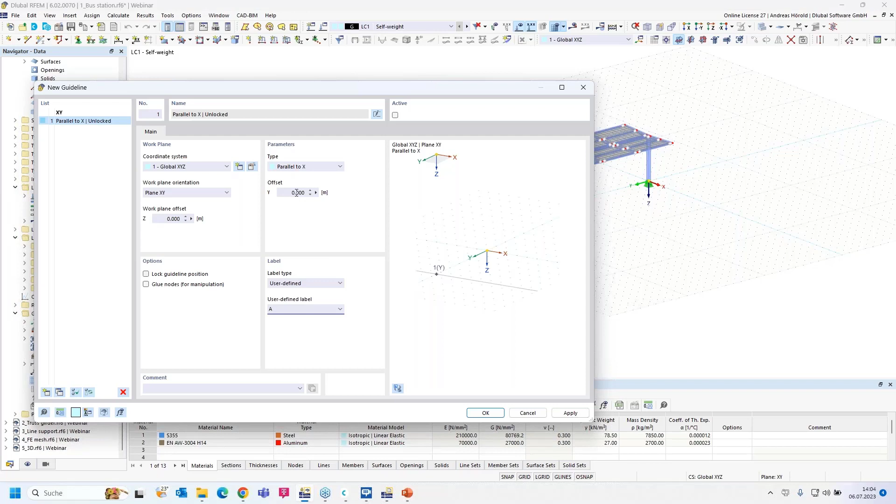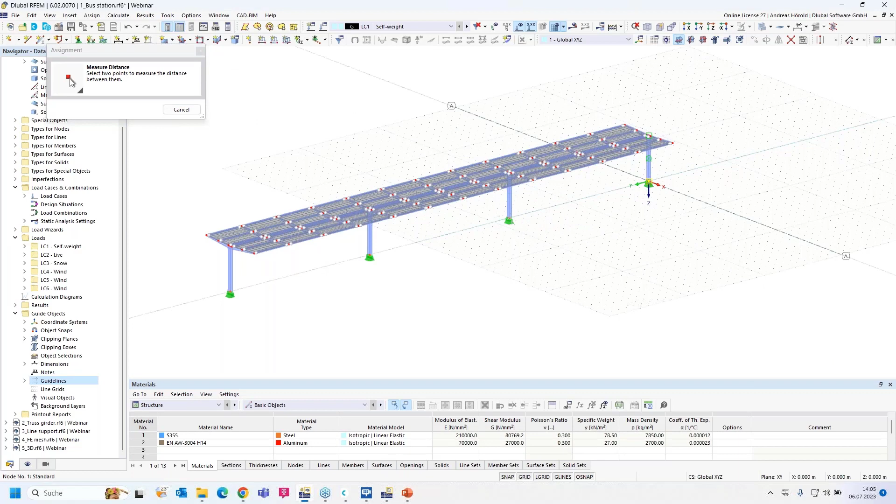So, we start with the first guideline. We call it A, parallel to X, and start with an offset of 0. Apply - and you can see in the RFEM window that the first guideline has been created. We activate it, then copy the guideline and change the offset. Let's measure the distance between the two columns here - okay, 18 meters - and we rename the guideline.

Apply. Then we create the other guidelines with the same workflow - 36 meters - and rename the guideline. Apply. Then the last guideline: I only change the offset and the name.

So all the guidelines in the X direction are created. Now you can see the distance between the guideline's name and the node is very far. You can change that - for example, by right-clicking and pressing edit. Or I'll leave the dialog and show where else you can find it, under Tools at the top: Tools, Work Plane, Grid, Snap, and so on.

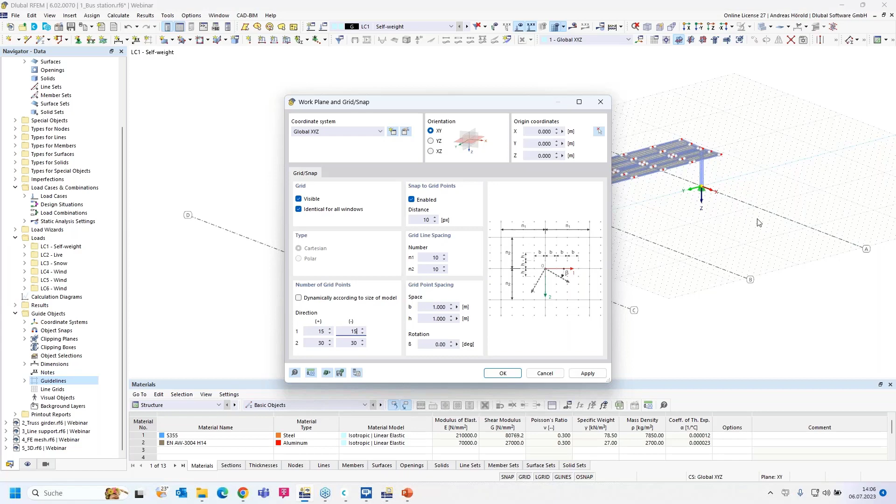Okay, then you can enter distances here: 15 plus and 15 minus in the X direction, and for example 70 and 10 in the Y direction. I apply, and you can see the name has moved near the node.

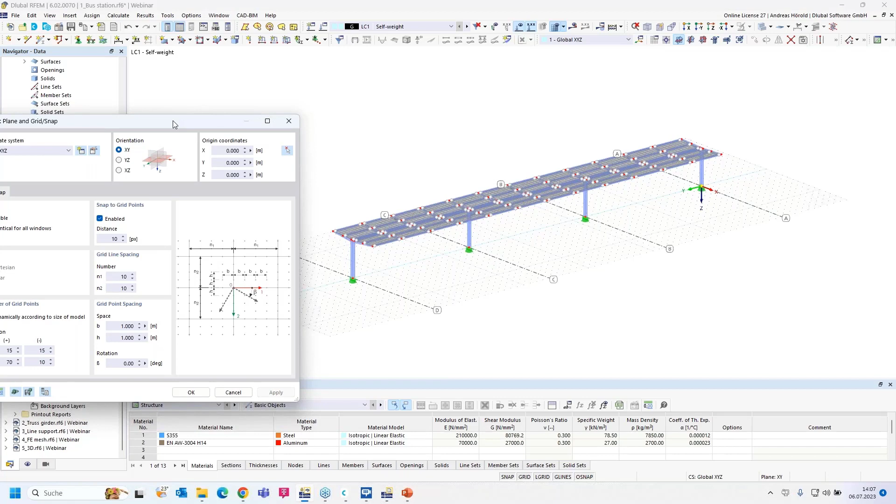You can also check dynamically according to the size of the model. Let's do that - and you can see that the number of grid points are created automatically.

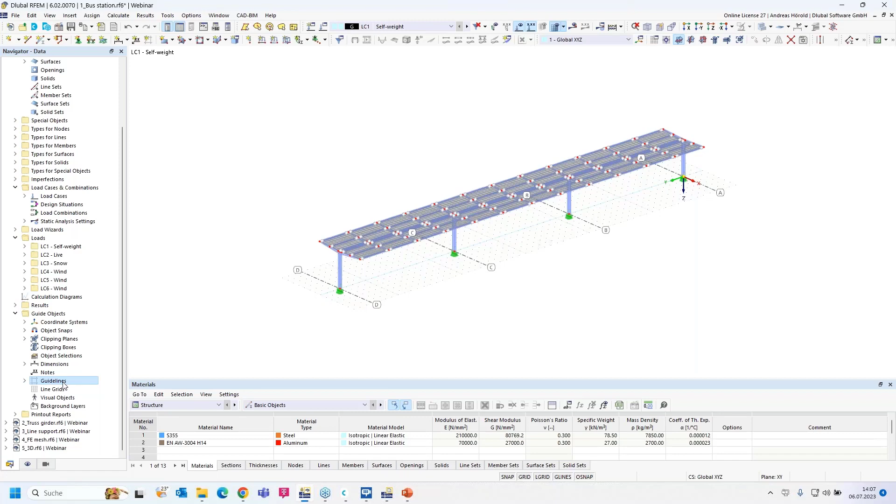Now let's create the last guideline in the Y direction. I create a new guideline, parallel to Y, offset 0, and a user-defined name - I name it 1. Apply that. Now everything is okay.

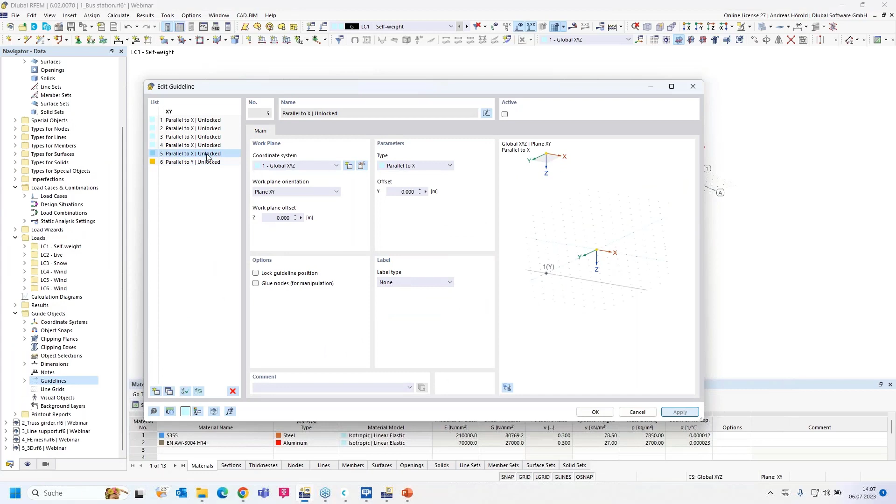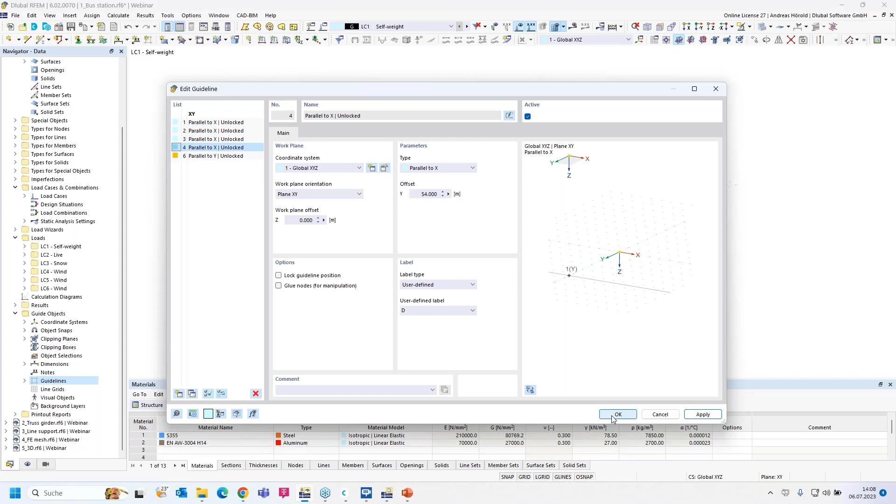No, this one is not correct. Now you can move, copy, or delete all the lines here, or certain lines. Okay, now our guidelines are created.

Just an example. So then we turn to the next model and the next question. Next question is: I came across the area of load application setting in the load wizard. How does this setting affect the magnitude of the load in my model?

So this is a load that has been created with the load wizard. I double click on it, and you can see that dialog. And how you can create such a load, I will show that.

First, you have to select in the base data, here left at the top, under add-ons the load wizard that must be activated, but this is a default setting. The combination wizard and the load wizard are selected by default.

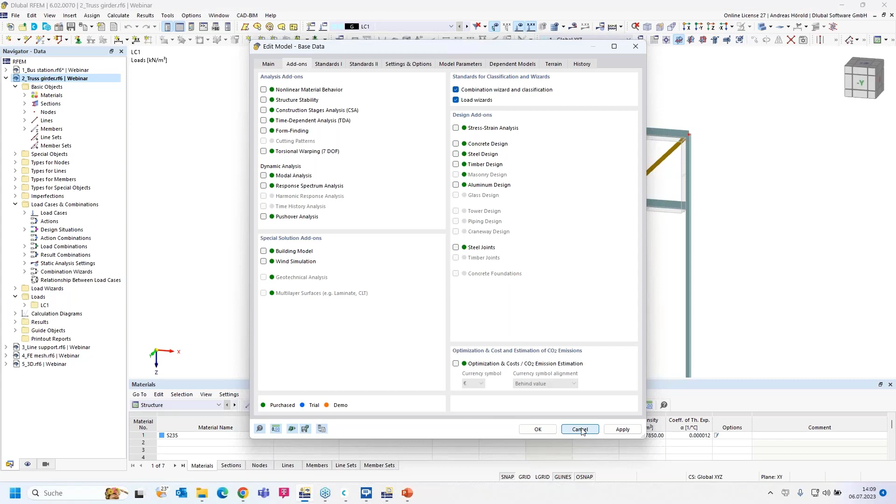And then here on the left side at the top, insert, there are the load wizards. There are different load wizards: member load from area load wizard, for example. This is the load that I created before, what you can see in the model. There are also the snow load wizard and the wind load wizard, for example, and our two wizards.

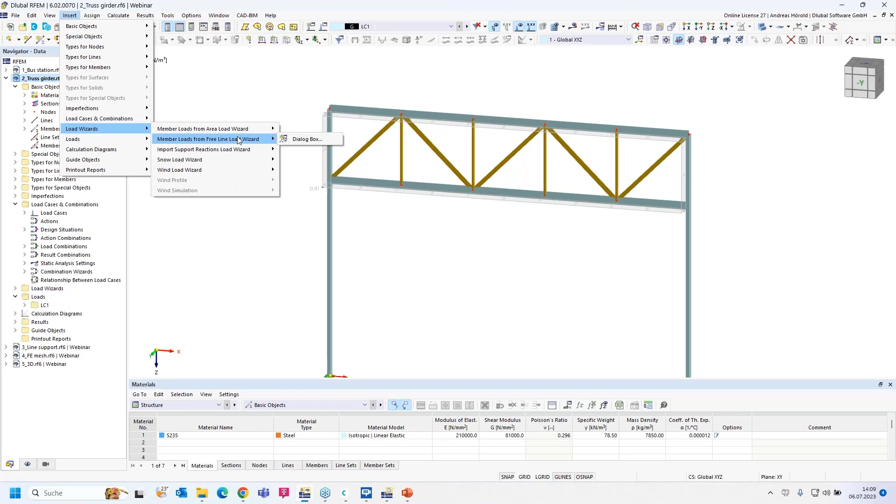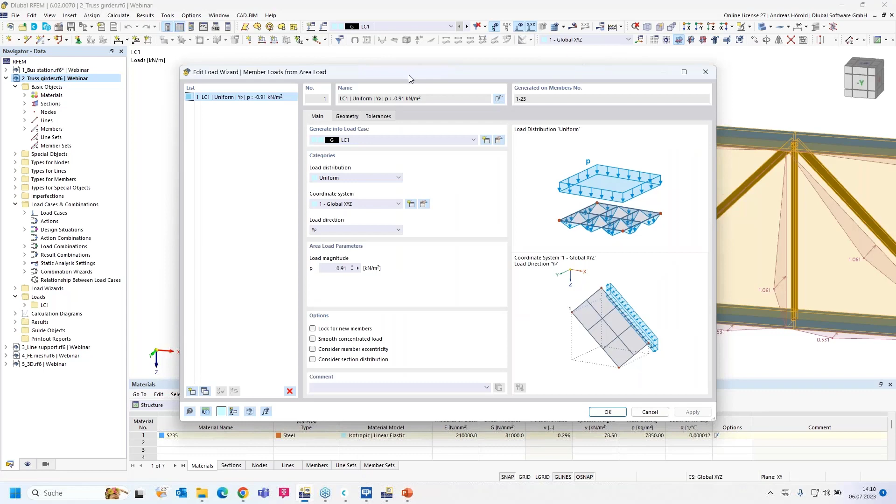Okay, let's display it separately. Now with a right click, I can display the loads separately. So now I double click on the load and open the dialog. Under geometry, you can see this setting: fully closed plane.

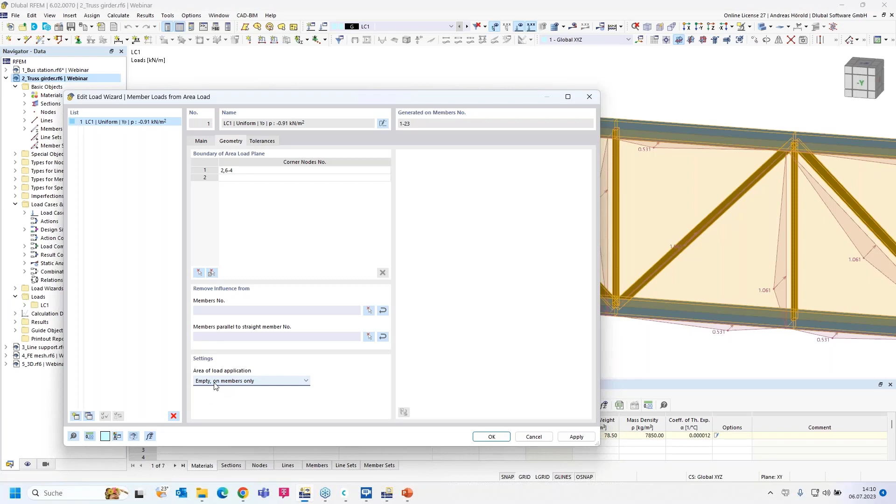The complete, where there's, for example, a plate or the trapezoidal sheet over the members, and all members get a load, and the wind can affect the full area here. So if you want only the members to get a load, only this small area, then you have to select empty on members only.

We can see that at the moment the vertical and the diagonals get a load of about 1 kilonewton per meter, and if I apply that, you can see that the load has decreased. Only the members are affected by a wind load.

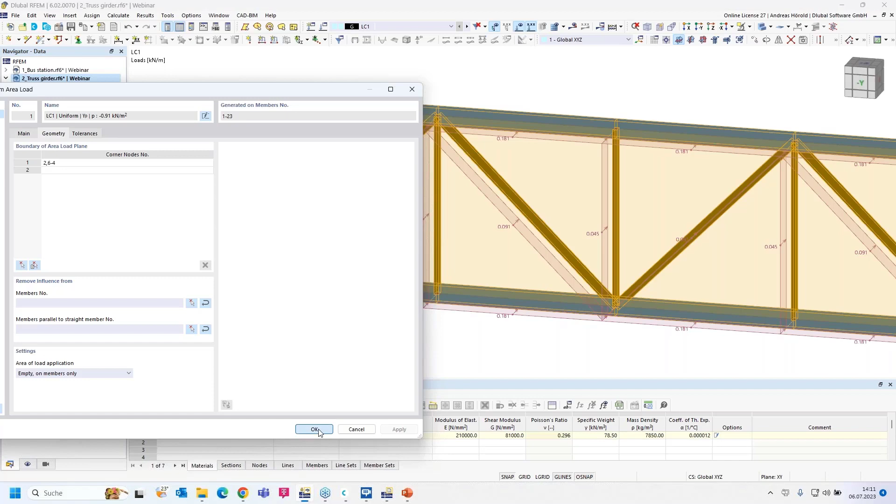So if you, for example, change that member - at the moment the width is 10 centimeters or 100 millimeters - and if I rotate the section, for example 90 degrees, you can see the load has decreased from 0.1 for this diagonal, and now it's only half of this value.

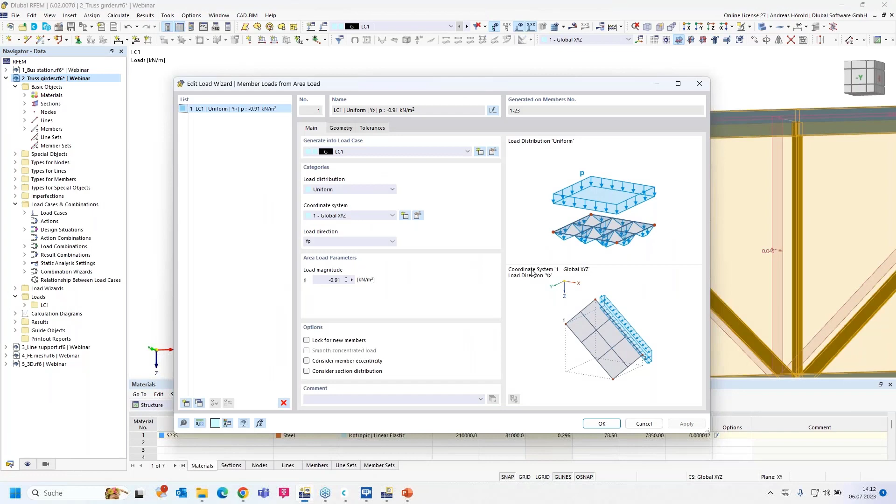Okay, that's the setting. I changed that back, or I press undo, and you can see now the load is 0.1, or about 0.1. And I do another change.

Imagine that, for example, a trapezoidal sheet spans from the lower beam to the upper beam, and only these beams are affected by the load or support the trapezoidal sheet. Then you can remove the influence from members parallel to straight members. I select all 3 members, and all members that are parallel to these 3 members don't get a load. Let's try that.

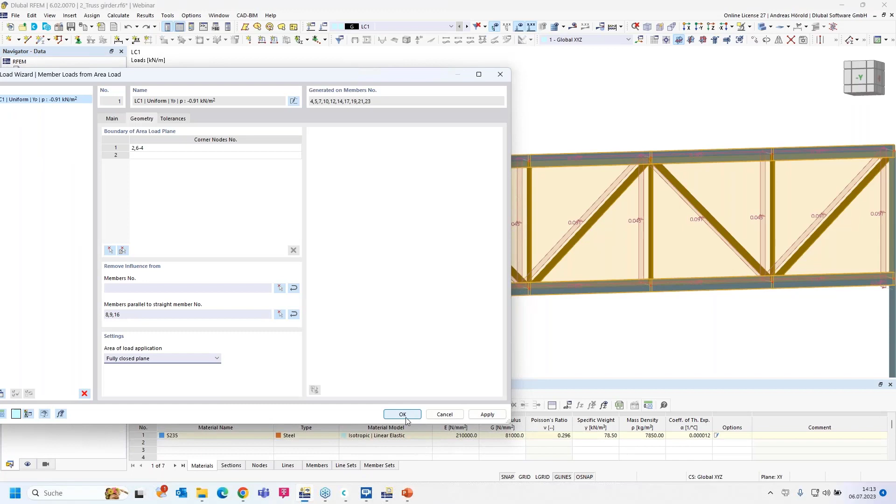Fully closed plane. Okay, so now that's the effect when a trapezoidal sheet spans from the lower to the upper horizontal beam.

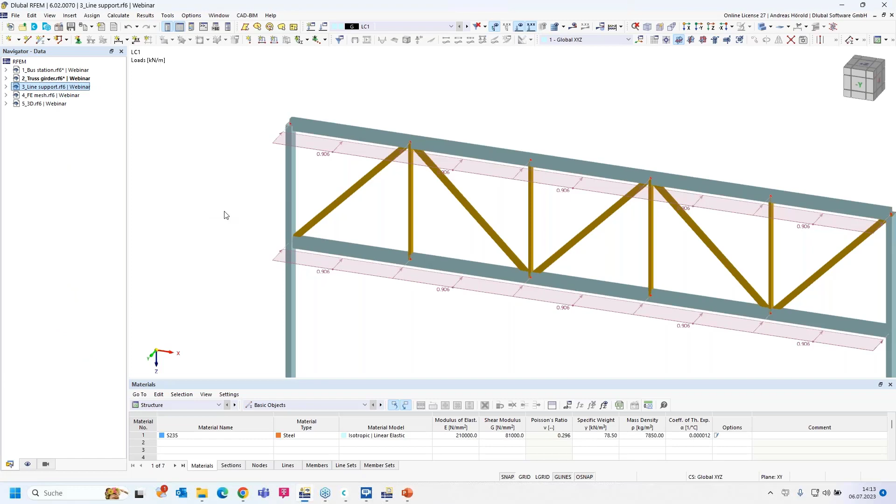Okay, let's turn to the next model and the next question. A surface model, a concrete slab from a building, for example. And the question is: can I get the program to calculate the spring of a wall for line support while modeling the wall at the same time?

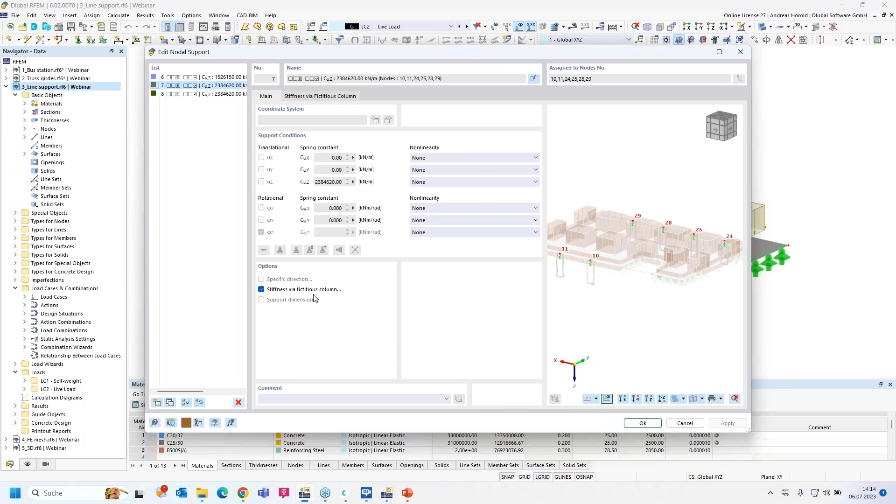In an earlier webinar, we showed a similar function or feature for the nodal supports. Let's double click on this nodal support, and when I press the edit button, you can see where 'stiffness via fictitious column' is selected. And when I turn to this dialog...

I can model the support by elastic surface foundation, elastic nodal support, and so on. You can enter dimensions, the height, and so on. Then if the column head is hinged or semi-rigid, and when you change that, the values for the springs are changing.

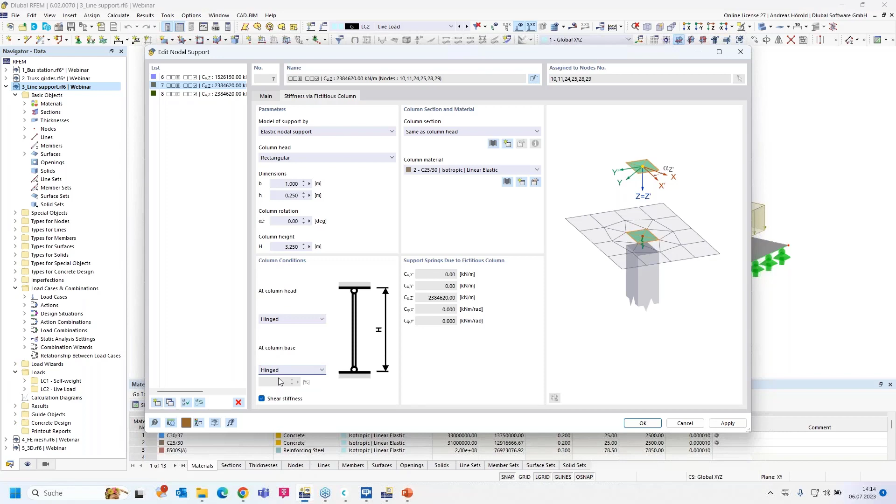Okay, so I leave the dialog, and we have got a similar function for the line supports. I double click on the line support and edit all the used line supports.

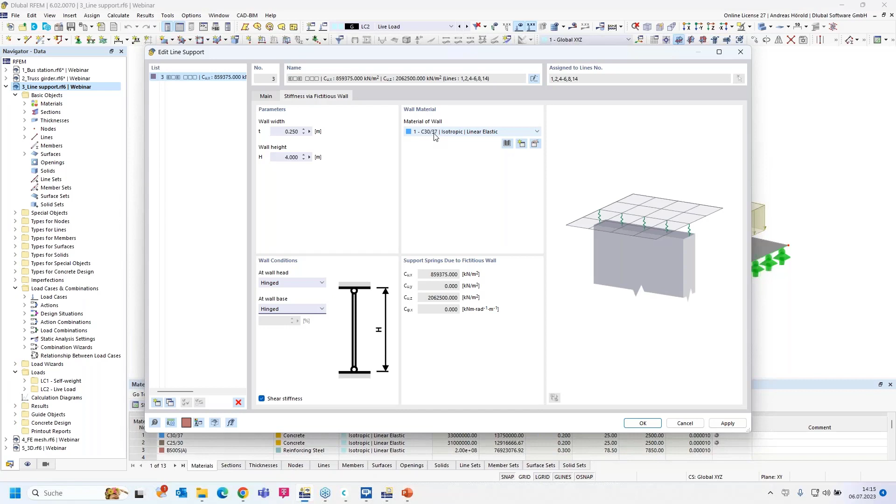Now you have to check the stiffness via fictitious wall. In the preview, you can see the walls already. You can enter a thickness of the wall, a wall height, and whether the wall head is hinged or rigid. Also for the wall base, you can enter a material. I'll leave the concrete material as it is, and you can see the considered wall in the preview.

Okay, and now you can see also springs for the line supports here, and this can avoid or smooth singularities in the FE calculation.

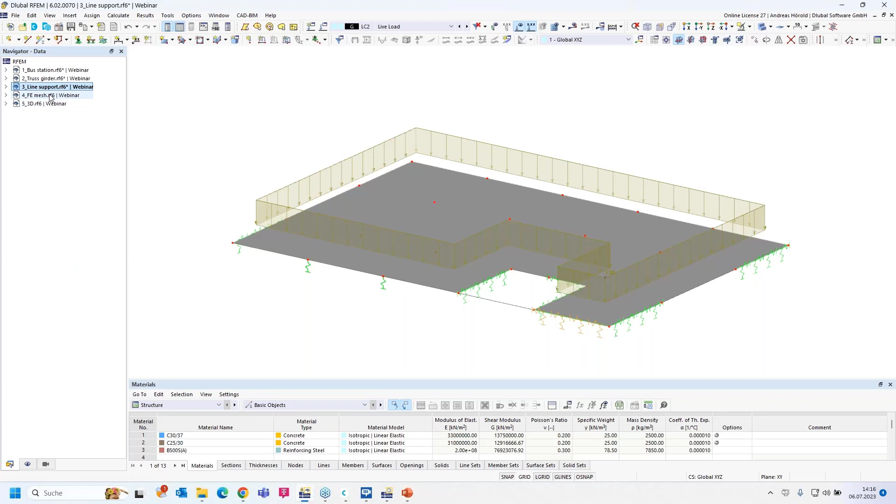Okay, that should be all to this question and this model. We turn to the next model and the next question: how can I create multiple FE elements across the thickness of elongated thin solids without having to create an extremely fine FE mesh? At the moment, you can see a steel plate here with a thickness of 20 millimeters.

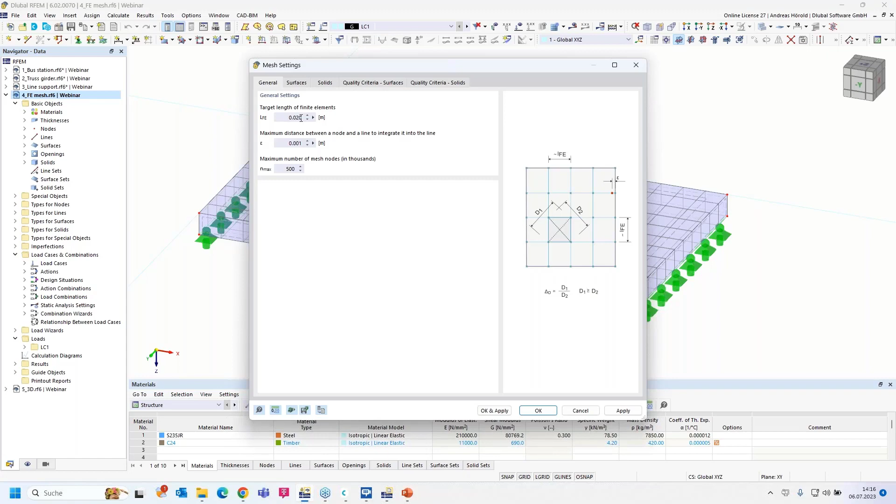I can go to the FE mesh settings. The FE mesh size is 2 centimeters, 20 millimeters, that's the thickness of the steel plate. For the width and length, the size of the FE mesh is quite okay, but not for the height. There's only one FE mesh.

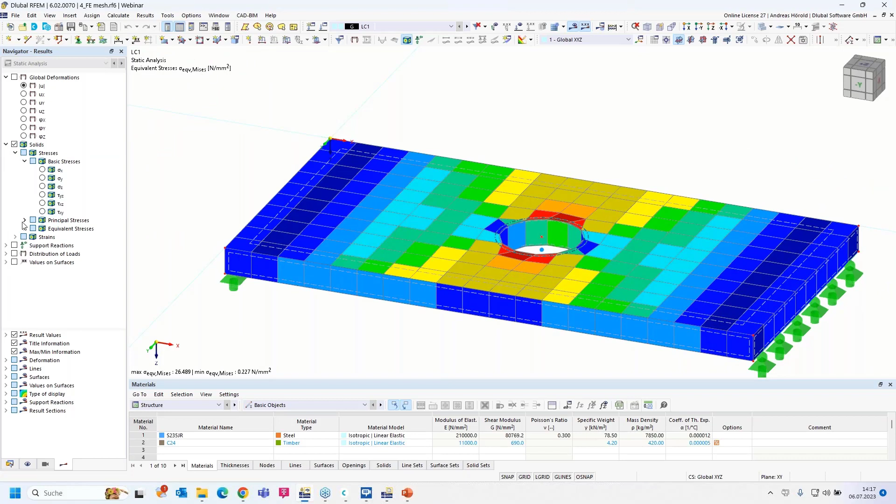You can see that in the results. There is only one FE element, and in that case the results for what is selected, the equivalent stresses, sigma V mises, are not okay.

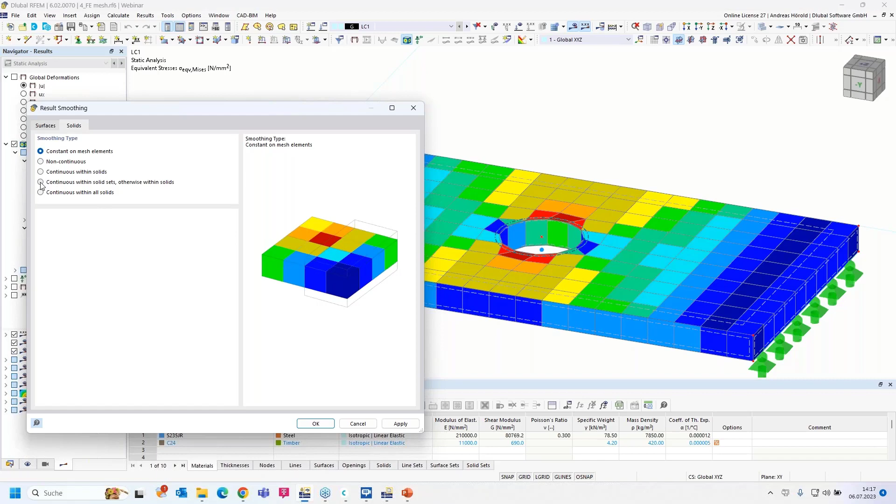So I double click on that point here to get into the dialog from the solid. Another possibility would be to go on the left side to the navigator data at the bottom, then open the solids - there's only one solid. You can double click on it or right click and edit, and the same dialog opens.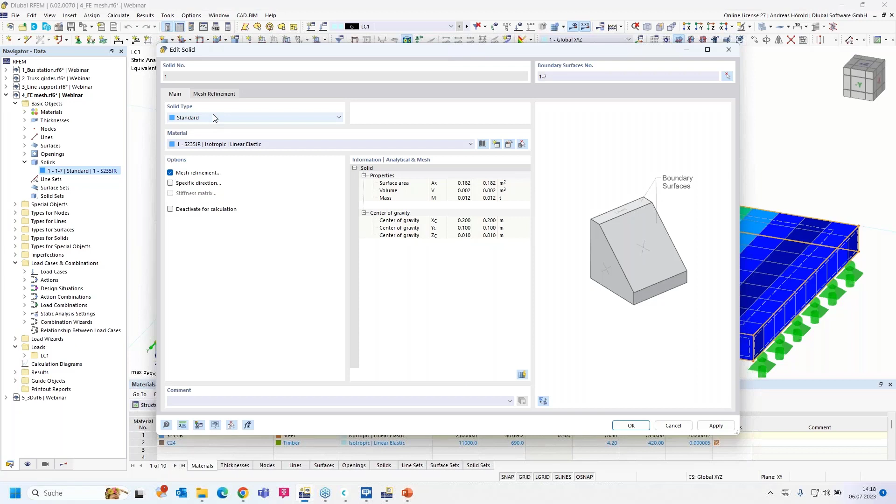So then mesh refinement I selected, and there is a quite new feature, the layered mesh. If you activate it and select one area or one surface, then the opposite surface is selected automatically by the program, and you can see in the graphic you can define a number of finite element layers.

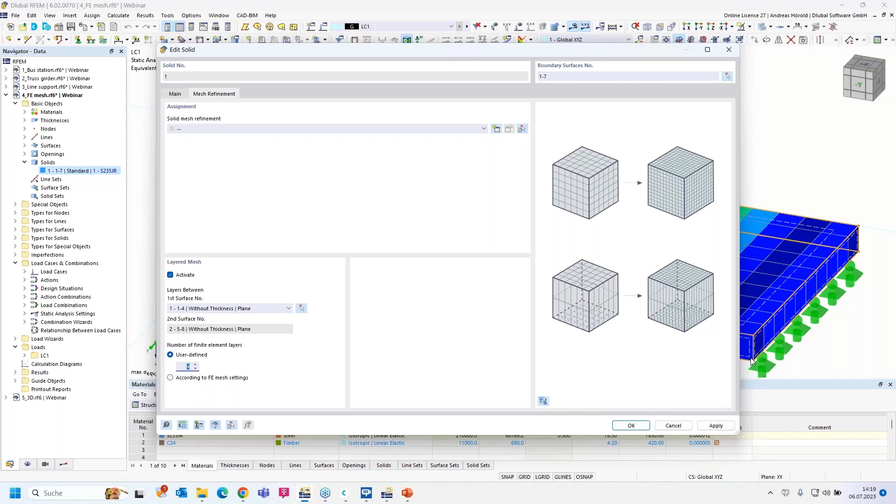So I increased it to 4 - at least 4 or 5 mesh or FE elements should be used for one distance here, in that case for the height or for the thickness. Okay, I applied it. Let's create here at the top.

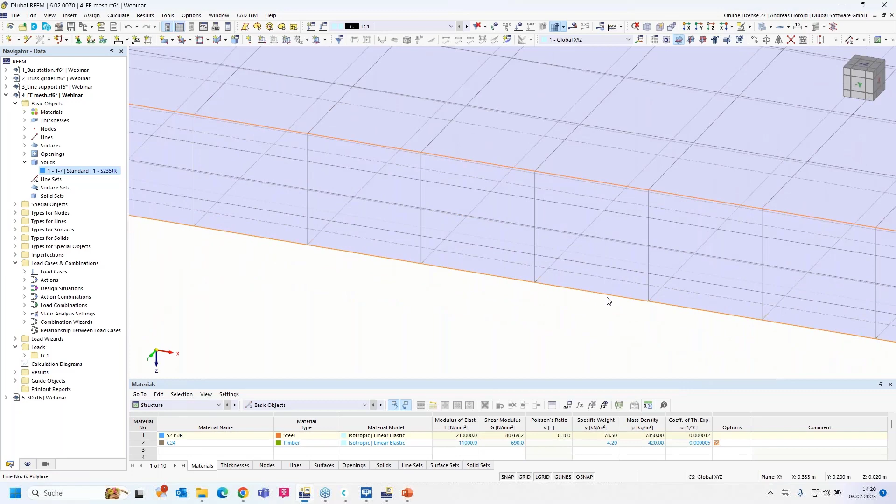We'll generate the mesh. Okay, and now you can see there are 4 elements or 4 layers for the thickness. Let's calculate all again. Okay, that looks quite good - there are 4 elements in the height, and the results are better than before.

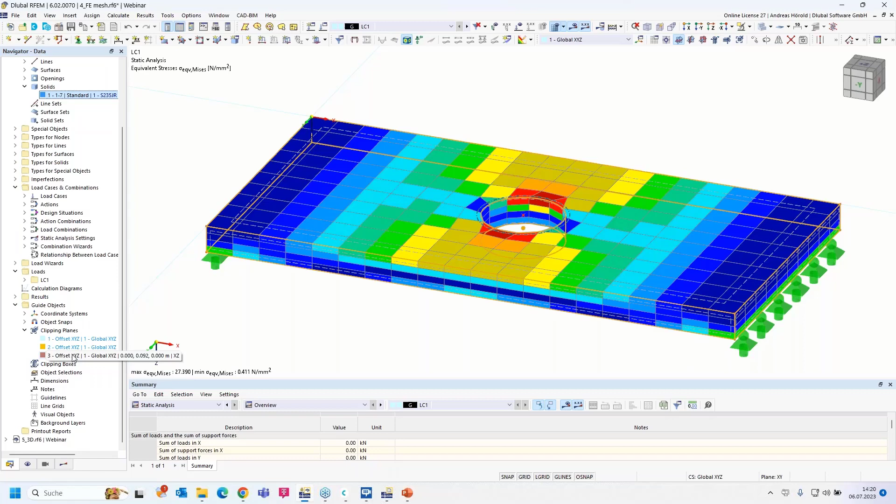Let's go through the solid here with the guide objects with a clipping plane. I activate any plane here, and now you can go through the solid and you can see the results are quite good, or good to evaluate.

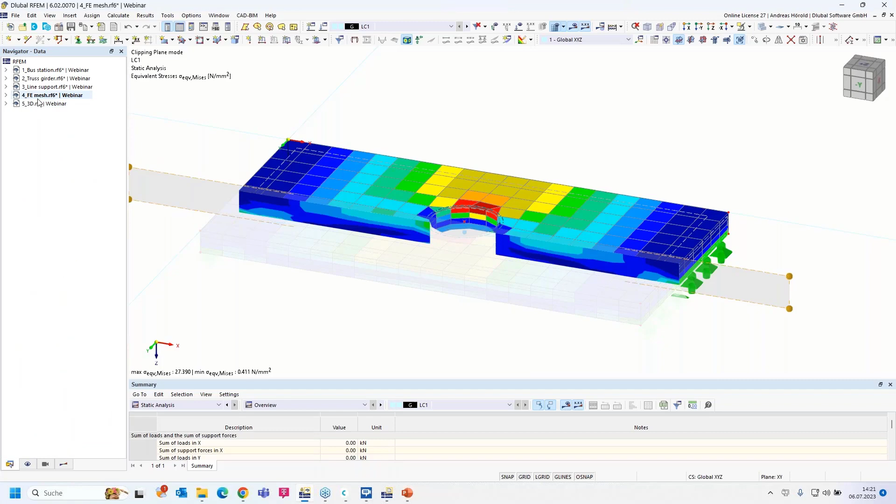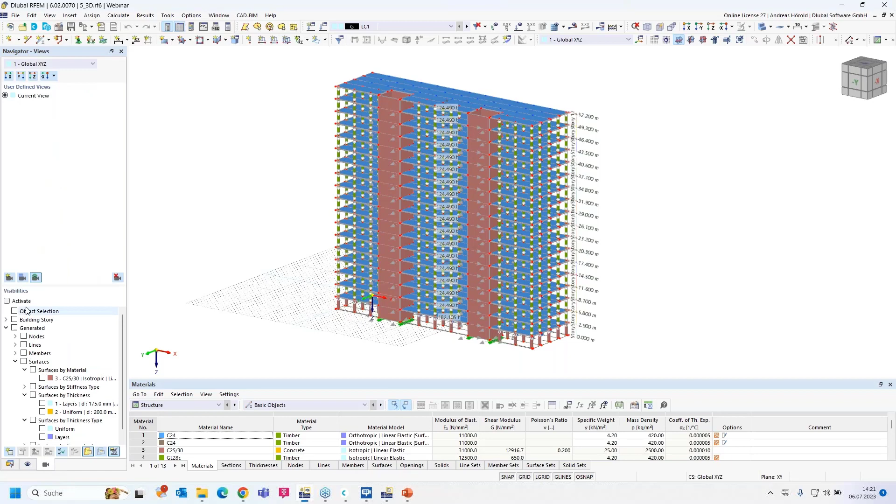Okay, that's all for this model and this question. The next question is, how do I customize the appearance of objects in the background? So you can, for example, select only the concrete cores. At the bottom left, you can go to the views and then activate the visibilities and the concrete surfaces.

And you can see the hidden objects are quite good to see, but a lot of users ask, how can I modify the transparency? So how do you do that?

Yeah, you can, of course, completely make that invisible with this function here, show hidden objects in background. You can deselect that and you can see the deselected objects.

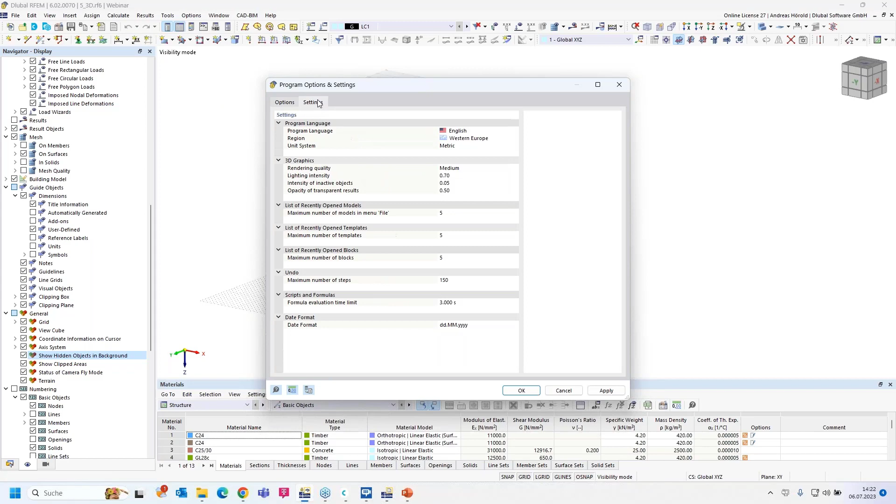So let's change or modify the transparency under options at the top. You can go to the program options, and under settings you can find this setting here, intensity of inactive objects.

Now you can increase the number here, apply, and you can see the changes.

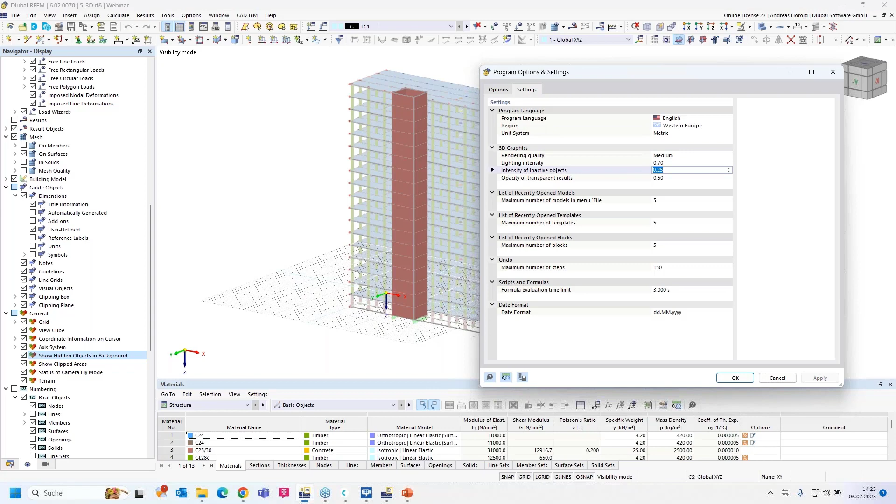Okay, quite an important feature, I think, because sometimes it's annoying when you see all the deselected elements and so on.

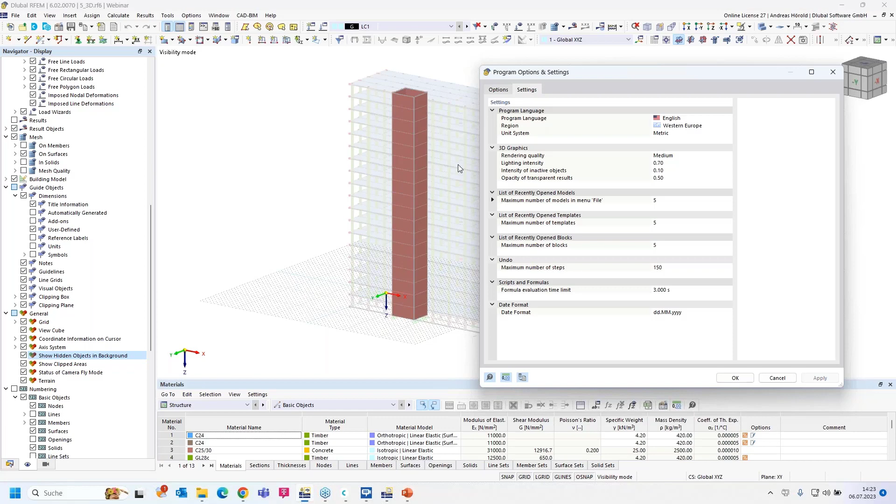Okay, so then we turn to the last question for today. I turn back to the first model, the bus station. I display the results. The deformation is okay. So the question is, in the model space of RFEM 6, I can exaggerate the deformation according to a factor. How can I do the same in the graphic printout? Or rather, how can I adopt the same display factor from the model?

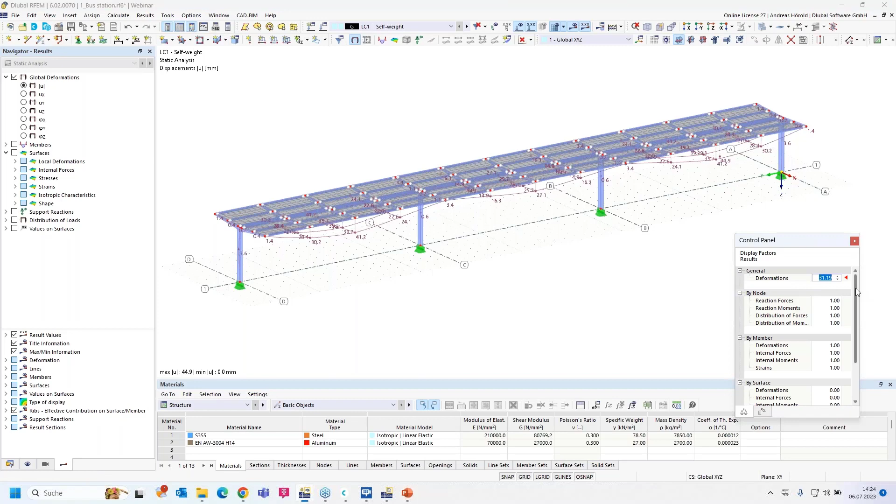So I select the control panel, or I display it, and you can change the number here, the deformation factor. You can increase it or decrease it. And the question is, how can I do that in the printout report? So let's print that graphic in the printout report. Here on the left, you can find the feature print graphics to printout report.

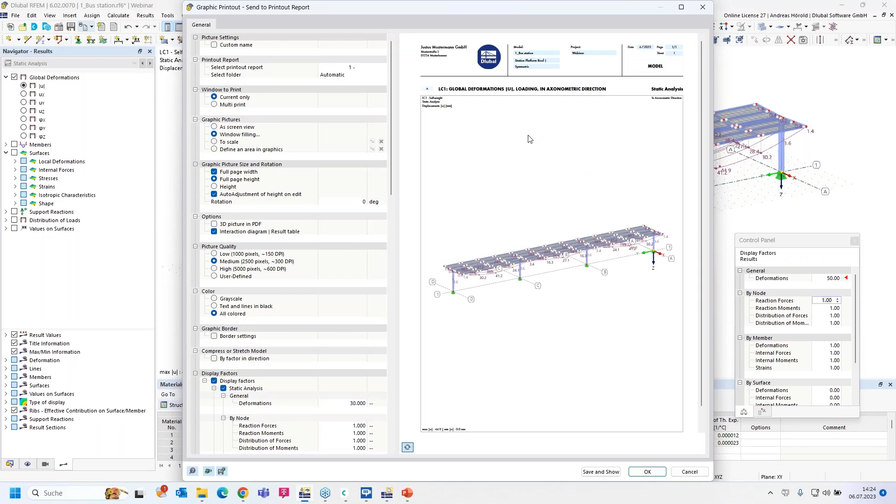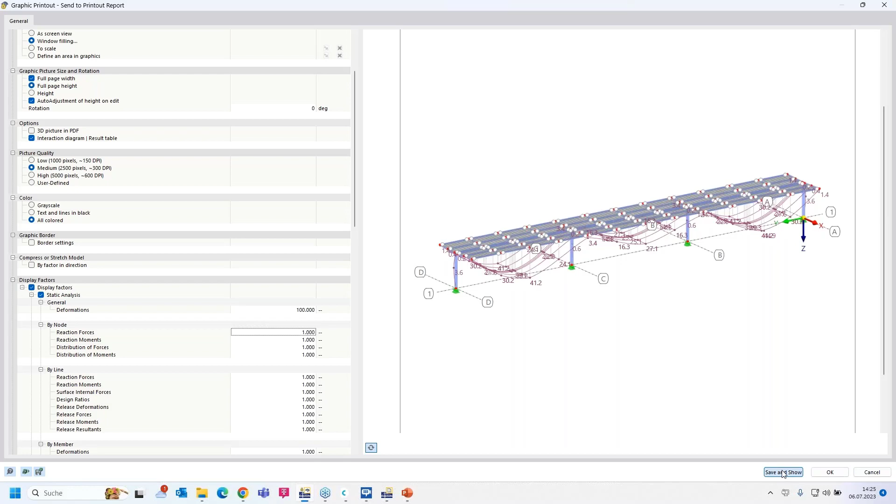So, under the default settings, you can select the display factor and the static analysis in this case, because it's the deformation from the static analysis. And you can increase the number as well. And you can see the change in the preview here. So then we can press save and show. And we can see the graphic in the printout report.

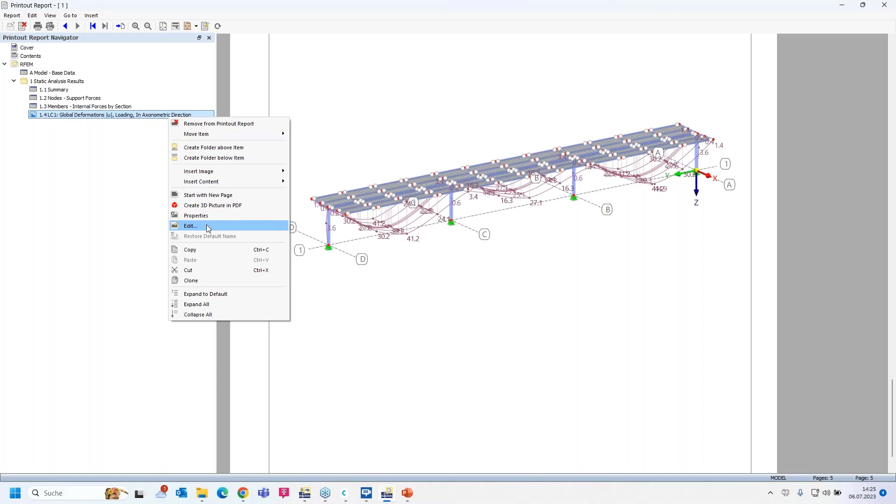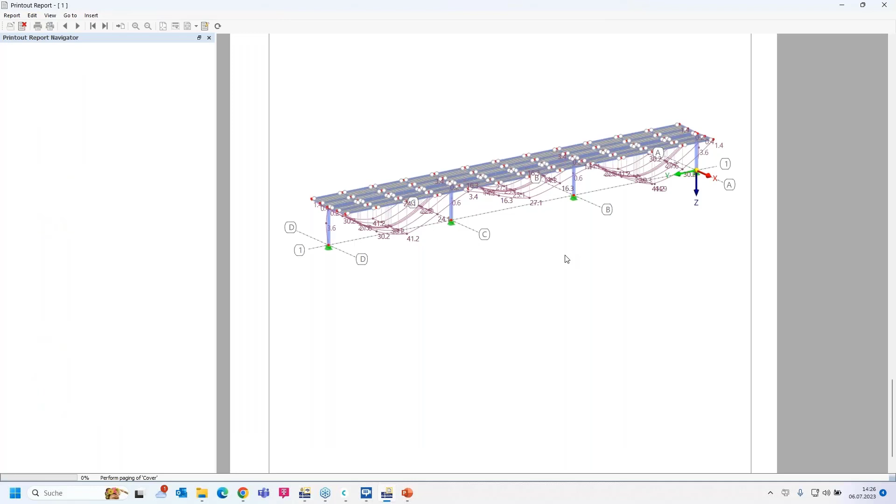And you can change or modify that graphic afterwards as well. So let's do that. I do a right click on the left side, then properties, or at first I press edit. Okay, then you turn back to RFEM, and for example, you can change the view, right at the top, for example, in X direction. Okay. So then it should be updated in some seconds.

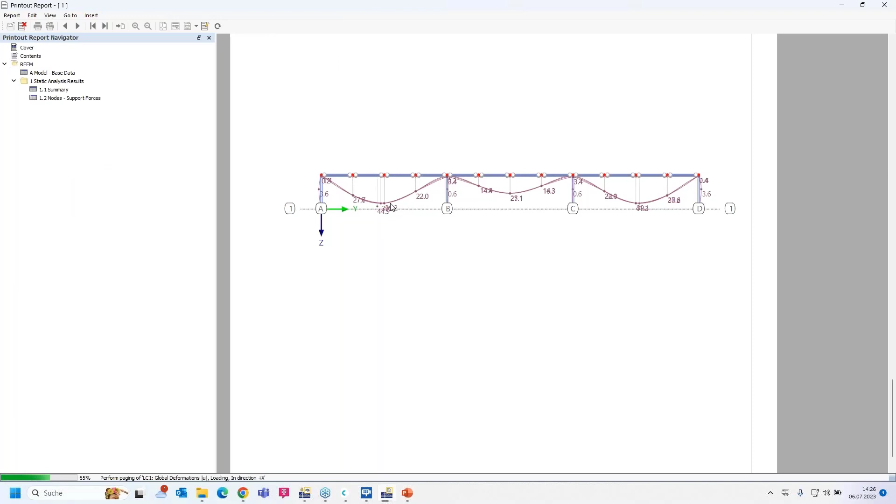Okay, and you can also change the properties. For example, the deformation factor. Okay, so the graphic should be updated. Okay, yeah, I think quite a good hint.